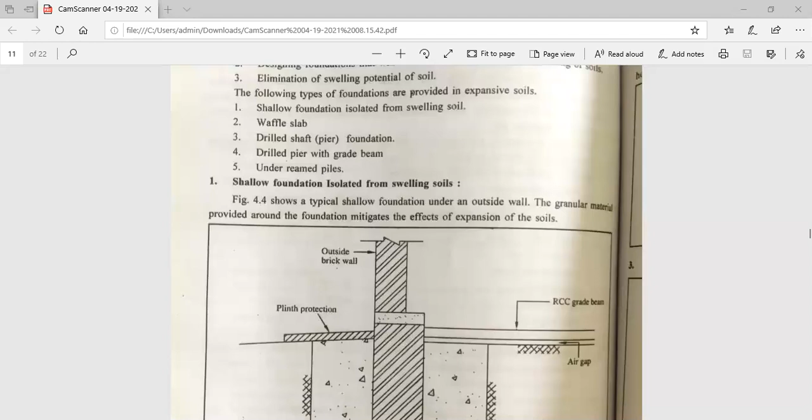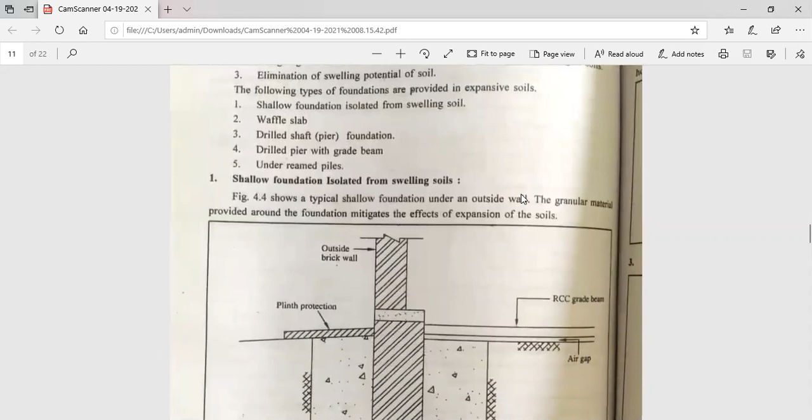Okay students, starting with the shallow foundation isolated from swelling soil.

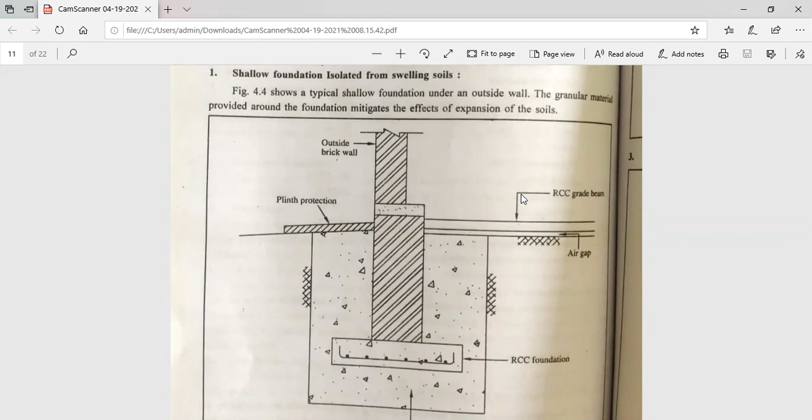This figure shows the typical shallow foundation under an outside wall. Granular material is provided around the foundation, which mitigates the effects of expansion of the soils. There is a plinth protection given, brick walls here, RCC foundation is given, granular fills are provided, and RCC grade beams are provided.

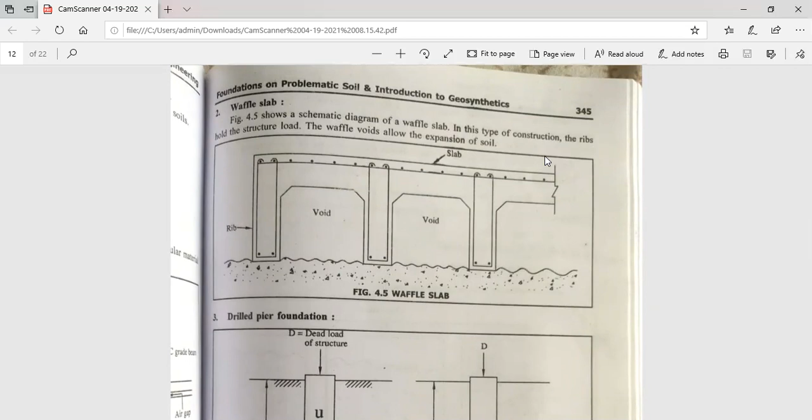Second is the Waffle slab. This figure shows a schematic diagram of a Waffle slab. In this type of construction, the ribs hold the structural load and the Waffle voids allow the expansion of the soils.

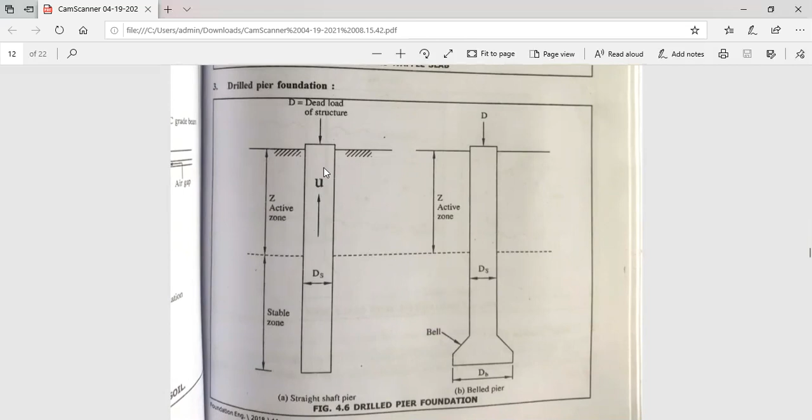Third one is a drill pier foundation. As you can see in this figure, this is our straight shaft pier, and second one is a belled pier. Z is described as the active zone, and below the active zone there is a stable zone. D is equal to dead load of the structure.

Drill piers are commonly used to resist the uplift forces caused by the swelling of soils. Drill piers made with an enlarged base are called belled piers, and when made without an enlarged base are called straight shaft piers. The bottom of the shaft should be below the active zone of expansive soil.

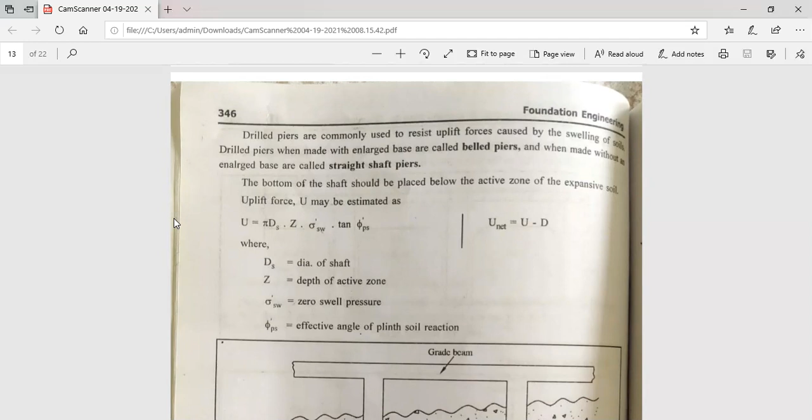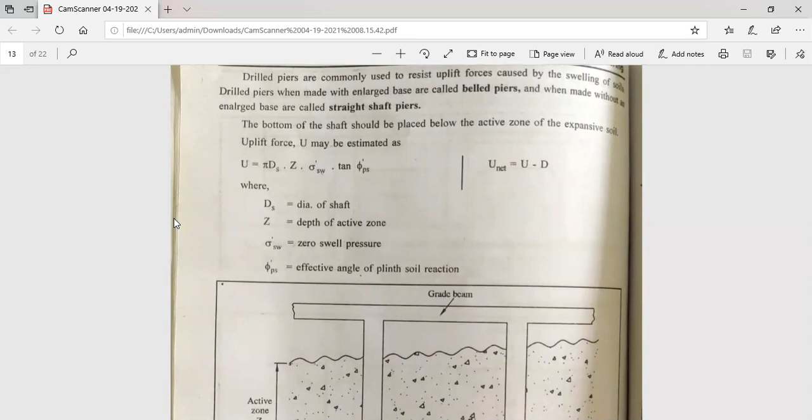Uplift force U may be estimated as U equals pi ds z sigma dash SW tan phi dash ps. Here ds is equal to diameter of shaft, z is equal to depth of active zone, sigma dash SW is equal to zero swell pressure, and phi dash ps is equal to effective angle of plinth soil reaction. This figure shows the drill pier with the grade beam.

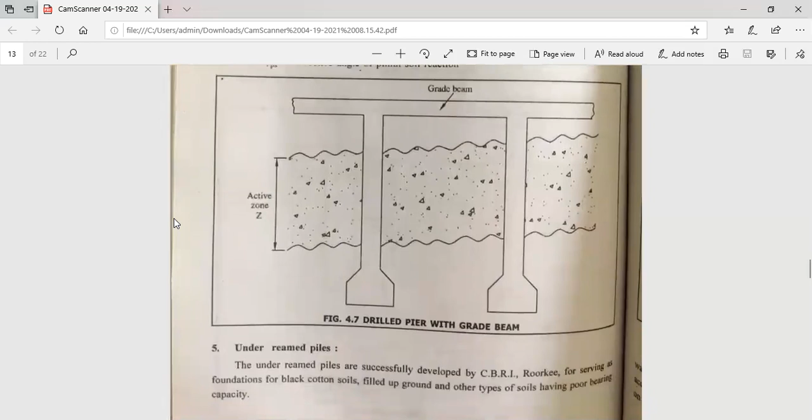Underreamed piles were successfully developed by CBRI Roorkee for serving as a foundation for black cotton soils, filled up grounds, and other types of soils having poor bearing capacity. The principle of this type of foundation is to anchor the structure at a depth where the ground movements due to seasonal moisture changes are negligible.

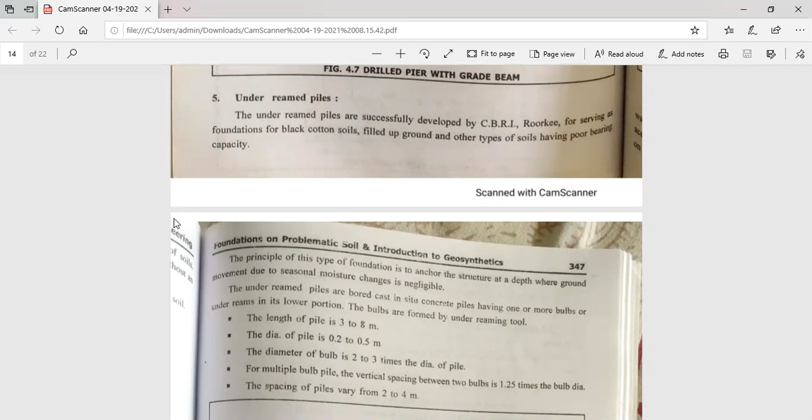Underreamed piles are bored cast-in-situ concrete piles having one or more bulbs or underreams in its lower portion. Bulbs are formed by an underreaming tool. Length of pile is 3 to 8 meters, the diameter of pile is 0.2 to 0.5 meter, and the diameter of bulb is 2 to 3 times the diameter of pile.

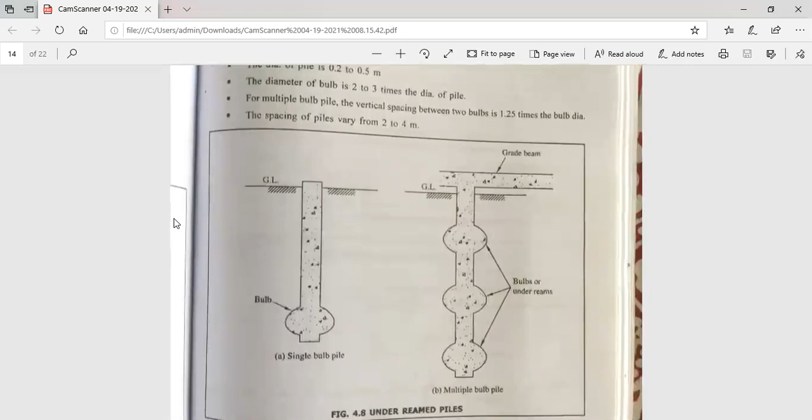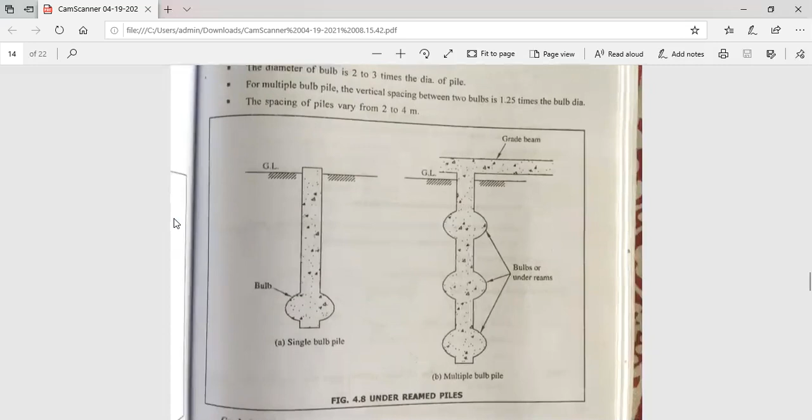For multiple bulb piles, the vertical spacing between two bulbs is 1.25 times the bulb diameter. The spacing of piles varies from 2 to 4 meters. There is a single bulb pile, and second one is a multiple bulb pile.

For grade beams, cast in situ as continuous monolithic beams on top of the piles, they support the wall of the building. On expansive soils, the beams are kept at least 8 centimeters clear of the ground to accommodate swelling of the soil. On non-expansive soils, the grade beams may rest on the ground.

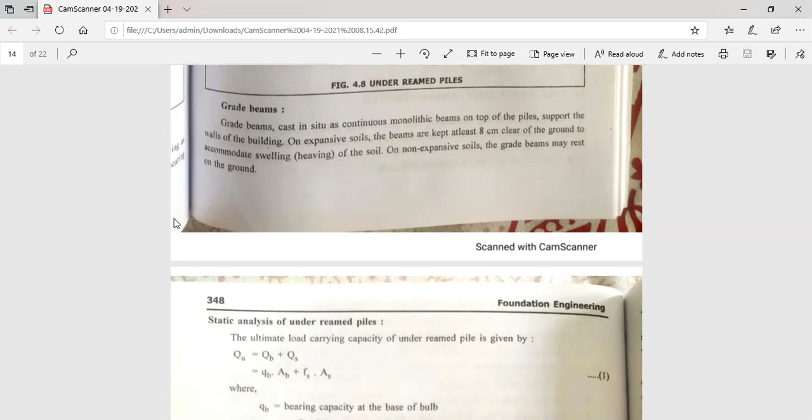Now, static analysis of underreamed piles. The ultimate load carrying capacity of underreamed piles is given by QU equals QB plus QS. Here QB equals small qB into AB, and QS equals FS AS.

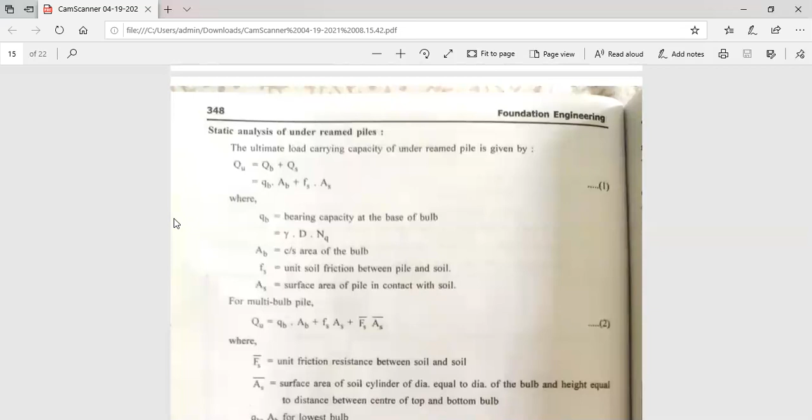Here small qB is equal to bearing capacity at the base of the bulb, and this equation is gamma D into Nq. AB is equal to cross-sectional area of bulb. FS is equal to unit soil friction between the pile and soil, and AS is equal to surface area of the pile in contact with soil.

For the multi-bulb pile, QU equals small qB into AB plus FS AS plus FS bar AS bar. Here FS bar is equal to unit friction resistance between soil and soil, AS bar is equal to surface area of soil cylinder of diameter equal to the diameter of bulb, and height equal to the distance between the center of top and bottom bulb. Here QB and AB are for the lowest bulb, and FS AS is for the pile above the top bulb.

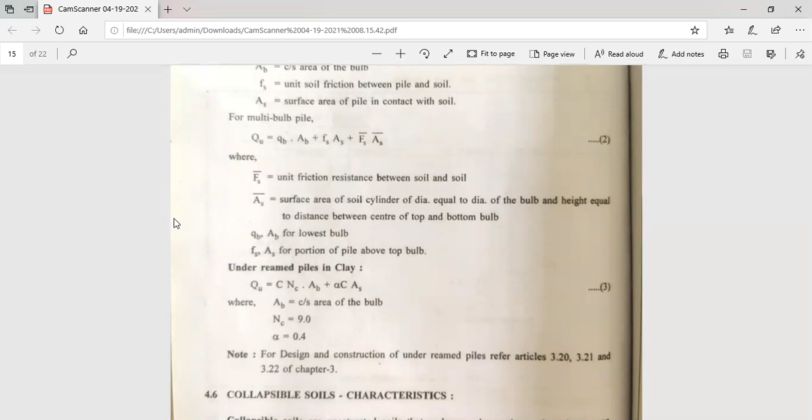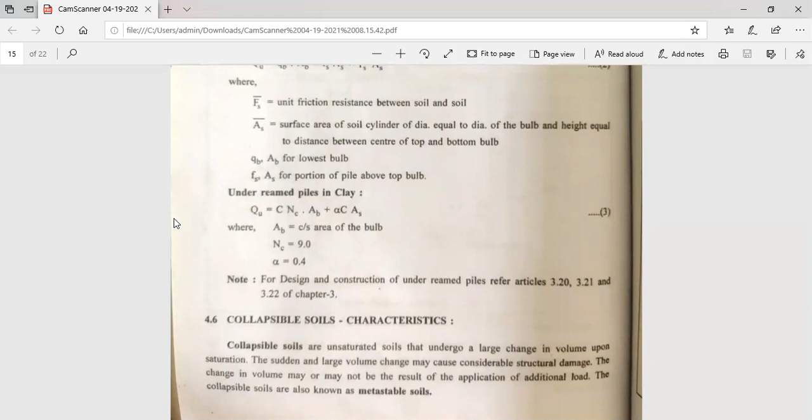So for underreamed piles in clay, the QU equation is equal to C NC AB plus alpha C AS. Here AB is equal to cross-sectional area of bulb, NC is equal to 9, and alpha is equal to 0.4.

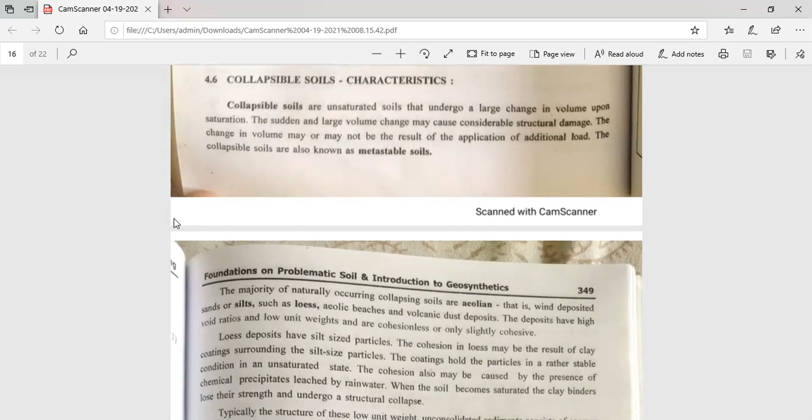For collapsible soil characteristics, collapsible soils are unsaturated soils that undergo a large change in volume upon saturation. This sudden and large volume change may cause considerable structural damage. The change in volume may or may not be a result of the application of additional load. So collapsible soils are known as metastable soils.

The majority of naturally occurring collapsible soils are aeolian, that is wind deposited sands or silts such as loess, aeolic beaches, and volcanic dust deposits. These deposits have a high void ratio and low unit weights, and are cohesionless or only slightly cohesive.

The loess deposits have silt-sized particles. The cohesion in loess may be the result of clay coating surrounding the silt-sized particles. The coating holds the particles in a rather stable condition in an unsaturated state. The cohesion also may be caused by the presence of chemical precipitates leached by rainwater.

When the soil becomes saturated, the clay binders lose their strength and undergo structural collapse. So the typical structure of these low unit weight, unconsolidated sediments consists of coarser particles bonded at their contact points by finer silts or clay fraction, or by the surface tension in the water at the air-water interface.

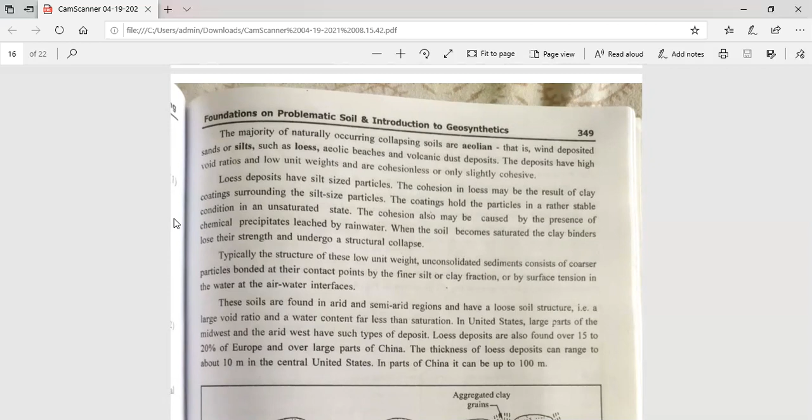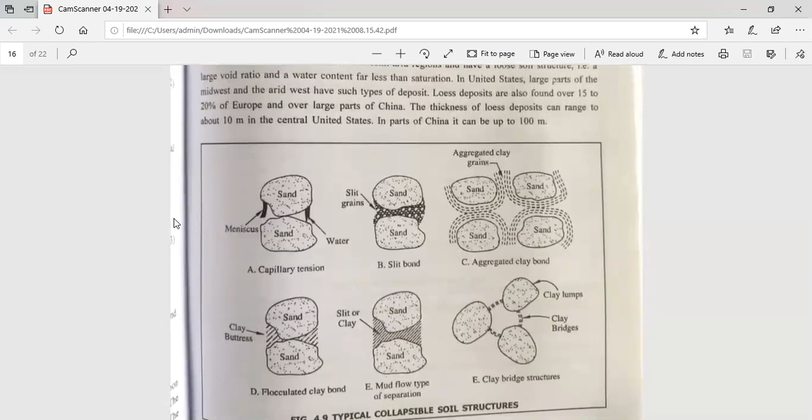These soils are found in arid and semi-arid regions and have a loose soil structure. The thickness of loess deposits can range about 10 meters in the central United States, and in parts of China it can be up to 100 meters.

The addition of water is widely used as an explanation for triggering soil collapse. Collapse can occur as the result of load application or wetting, or both. So collapse can occur either by increasing the stress above the soil strength or by lowering the soil strength below the stress. Whatever the physical basis of the bond strength, all collapsible soils are weakened by adding water.

Decreased strength is more immediate in cases where the grains are held together by capillary action, slower in the case of chemical cementing, and much slower in the case of clay buttresses. It may take long periods of time, even years, for total collapse to take place.

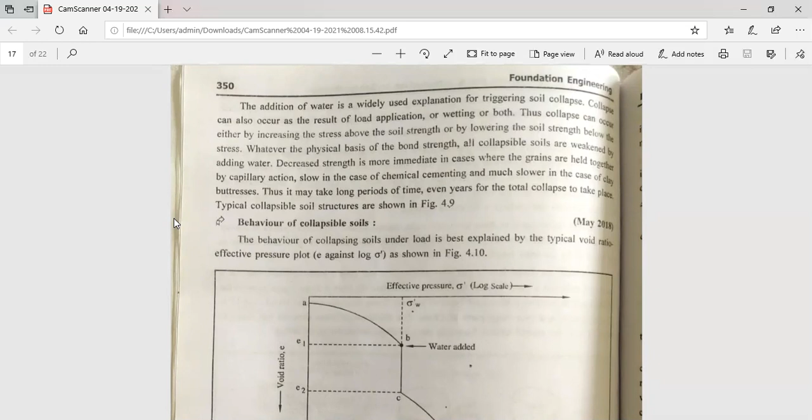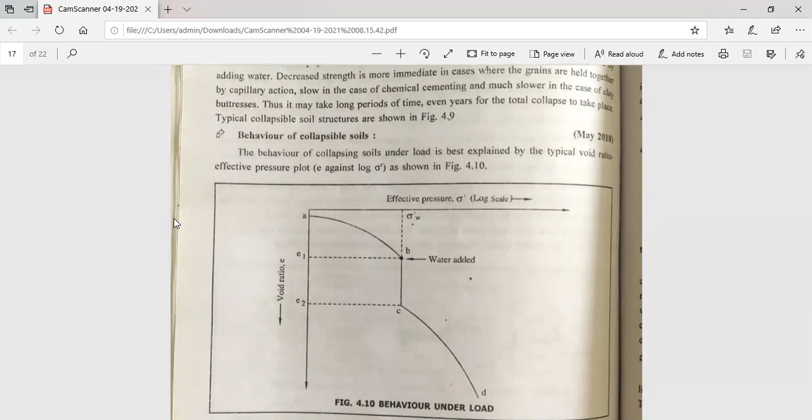The typical collapsible soil structure is as shown in the figure. The behavior of collapsible soils under load is best explained by a typical void ratio versus effective pressure plot, as shown in this figure.

At an effective pressure level of sigma dash W before saturation, the equilibrium void ratio is E1. However, if water is introduced to the specimen for saturation, the soil structure will collapse. After saturation, the equilibrium void ratio at the same effective pressure level, sigma dash W, is E2.

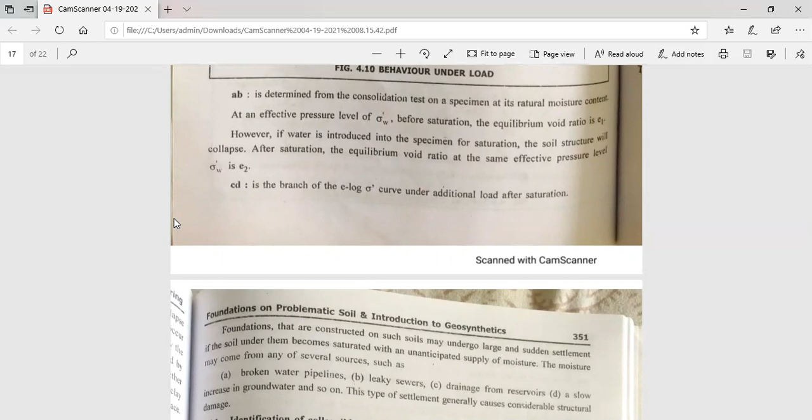Foundations constructed on such soils may undergo large and sudden settlement if the soil under them becomes saturated with an unanticipated supply of moisture. This moisture may come from several sources, such as broken water pipelines, leaky sewers, drainage from reservoirs, slow increase in groundwater, and so on. This type of settlement generally causes considerable structural damage.

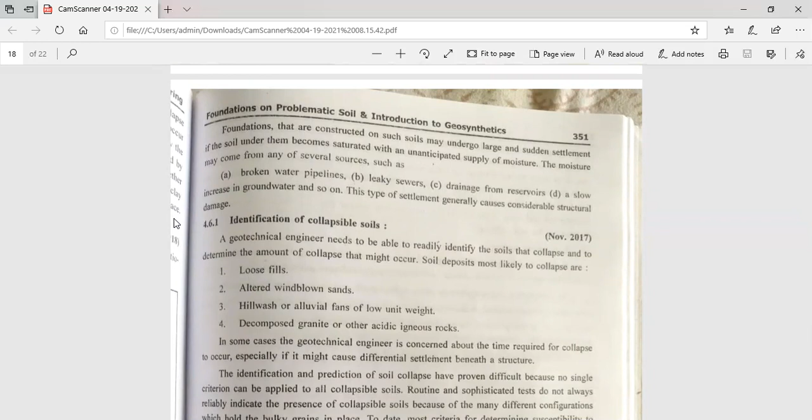For identification of collapsible soils, the geotechnical engineer needs to be able to readily identify the soils that collapse and to determine the amount of collapse that might occur.

The soil deposits most likely to collapse are loose fills, altered wind-blown sands, hillwash or alluvial fans of low unit weight decomposed granite or other acidic igneous rocks.

In some cases, the geotechnical engineer is concerned about the time required for collapse to occur, especially if it might cause differential settlement beneath the structure.

The identification and prediction of soil collapse have proven difficult because no single criterion can be applied to all collapsible soils. Routine and sophisticated tests do not always reliably indicate the presence of collapsible soils, because of the many different configurations which hold the bulky grains in place.

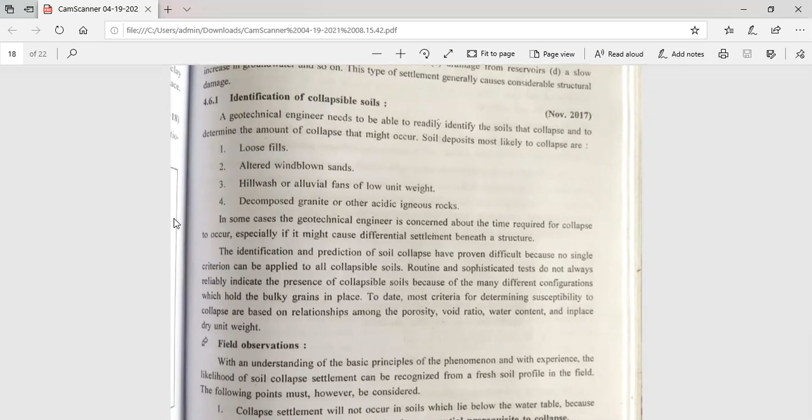To date, most criteria for determining the susceptibility to collapse are based on relations among the porosity, void ratio, water content, and in-place dry unit weight.

There are also field observations. With an understanding of the basic principles of the phenomenon and with experience, the likelihood of soil collapse settlement can be recognized from a fresh soil profile in the field, so that the following points must be considered.

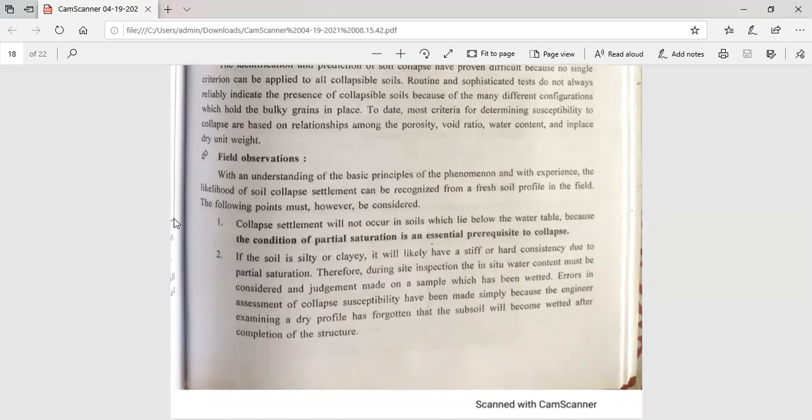Collapse settlement will not occur in soils which lie below the water table, because partial saturation is an essential prerequisite to collapse. Second, if the soil is silty or clayey, it will likely have a stiff or hard consistency due to partial saturation. Therefore, during site inspection, the in situ water content must be considered and judgment made on a sample which has been wetted. Errors in assessment of collapse susceptibility have been made simply because the engineer examined the dry profile and forgot that the subsoil will become wetted after completion of the structure.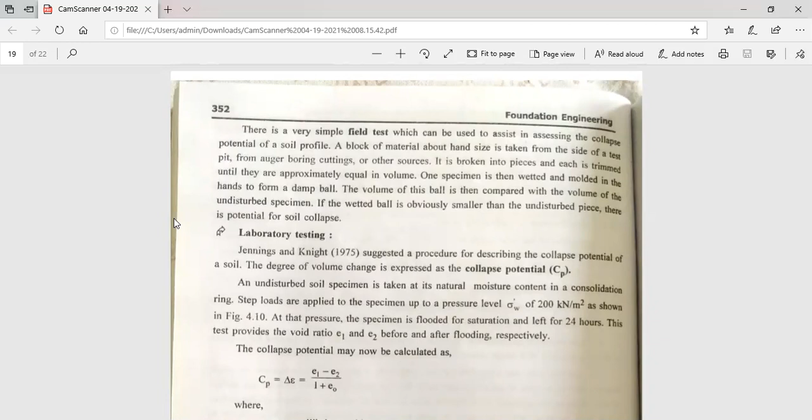There is a very simple field test which can be used to assist in assessing the collapsible potential of a soil profile. A block of material about hand size is taken from the side of the test pit, auger boring, cutting, or other sources. It is broken into pieces and each is trimmed until they are approximately equal in volume. One specimen is then wetted and molded in the hands to form a damp ball, and the volume of this ball is then compared to the volume of the undisturbed specimen. If the wetted ball is obviously smaller than the undisturbed piece, there is a potential for soil collapse.

There are some laboratory testing methods. Jennings and Knight in 1975 suggested a procedure for describing the collapse potential of a soil. The degree of volume change is expressed as collapse potential, known as CP. An undisturbed soil specimen is taken at its natural moisture content in a consolidation ring. Step loads are applied to the specimen up to a pressure level of sigma dash of 200 kN per meter square, as shown in the figure. At that pressure, the specimen is flooded for saturation and left for 24 hours. This test provides the void ratio E1 and E2, before and after the flooding.

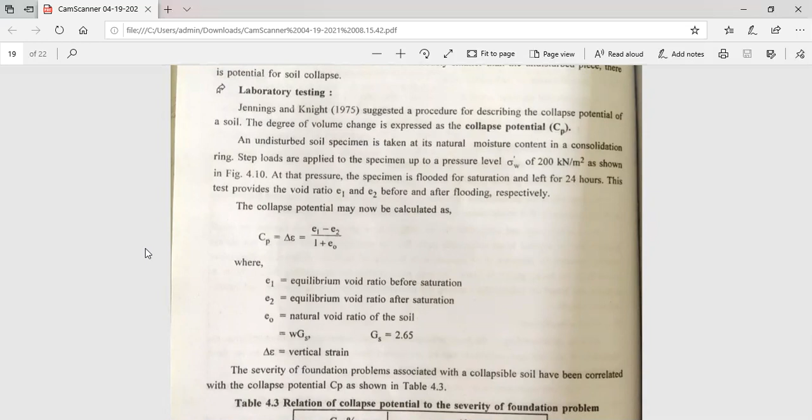The collapse potential may now be calculated as Cp equals delta E, which equals E1 minus E2, divided by 1 plus E0. Here E1 is the equilibrium void ratio before saturation, E2 is the equilibrium void ratio after saturation, and E0 is the natural void ratio of the soil, which equals W times GS, where GS equals 2.65, and delta E equals vertical strain.

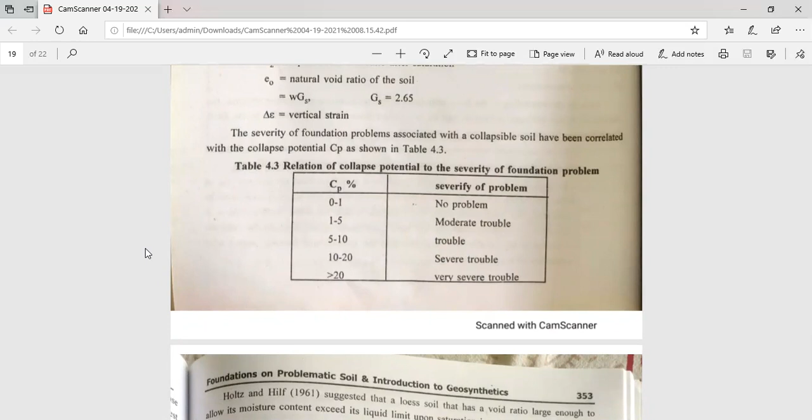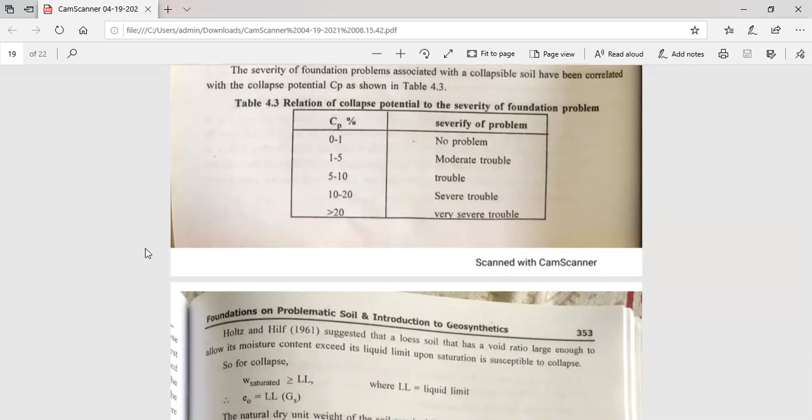The severity of the foundation problem associated with collapsible soil has been correlated with the collapse potential CP, as shown in the table. For CP percentage 0 to 1, it's no problem. For 1 to 5, it's moderate trouble. 5 to 10 is trouble. 10 to 20 is severe trouble. And for greater than 20, it's very severe trouble.

According to Holtz and Hilf, a loessial soil that has a void ratio large enough to allow its moisture content to exceed its liquid limit upon saturation is susceptible to collapse. So for collapse, W saturated is greater than or equal to LL, and E0 equals LL times GS. The natural dry density of the soil required for its collapse is gamma D equals GS times gamma W divided by 1 plus E0.

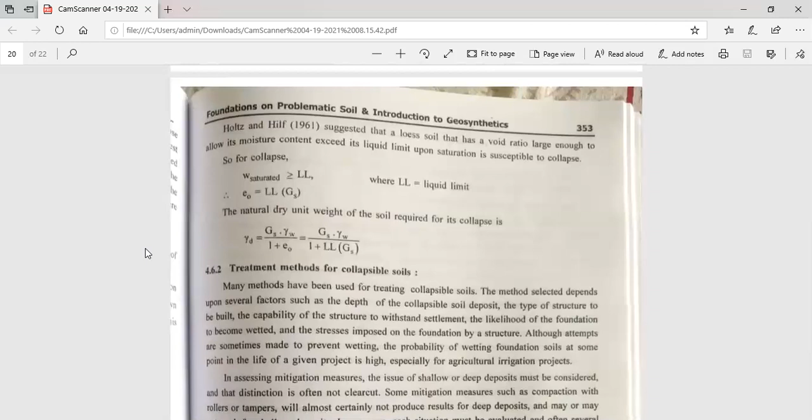Now, treatment methods for collapsible soils. Many methods have been used for treating collapsible soils. The method selected depends upon several factors, such as the depth of the collapsible soil deposit, the type of structures to be built, the capability of the structures to withstand settlement, the likelihood of the foundation becoming wetted, and the stresses imposed on the foundation by the structure.

Attempts are sometimes made to prevent wetting, since the probability of wetting foundation soils at some point in the life of a given project is high, especially for agricultural irrigation projects. In assessing mitigation measures, the issue of shallow or deep deposits must be considered, and that distinction is often not clear.

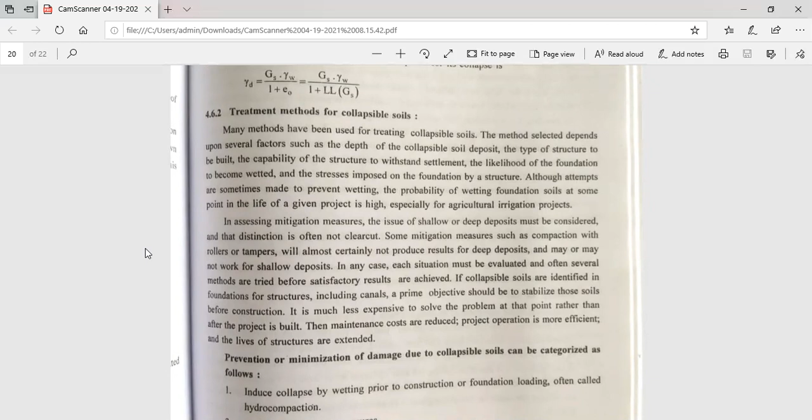Some mitigation measures, such as compaction with rollers or tampers, will most certainly not produce results for deep deposits and may or may not work for shallow deposits. In any case, each situation must be evaluated, and often several methods are tried before satisfactory results are achieved. If collapsible soils are identified in foundations for structures, including canals, a prime objective should be to stabilize those soils before construction. It is much less expensive to solve the problem at that point rather than after the project is built, so maintenance costs are reduced, the project's operation is more efficient, and the lives of structures are extended.

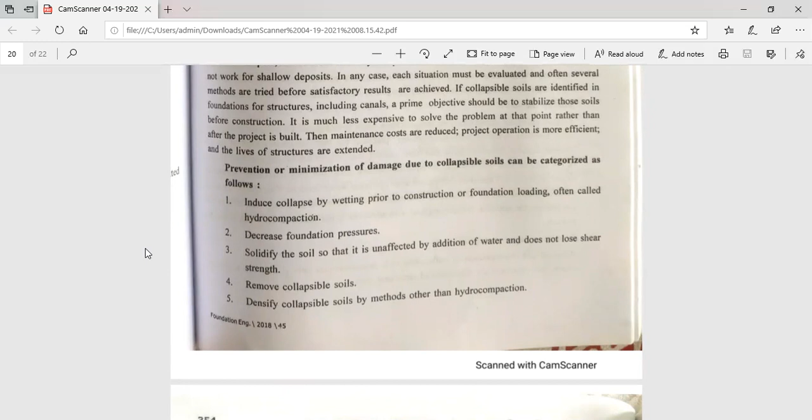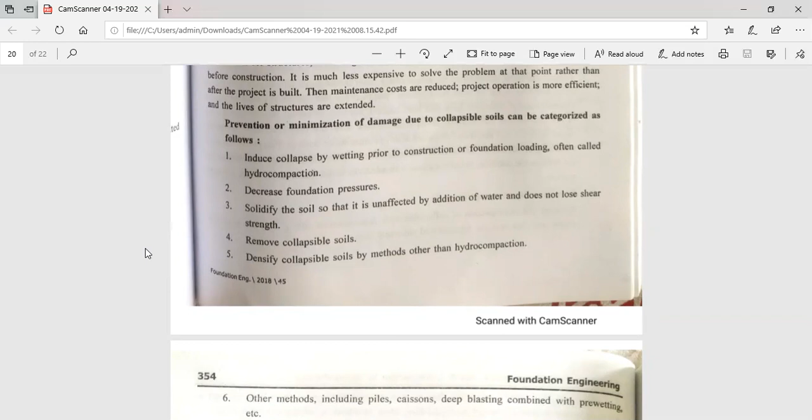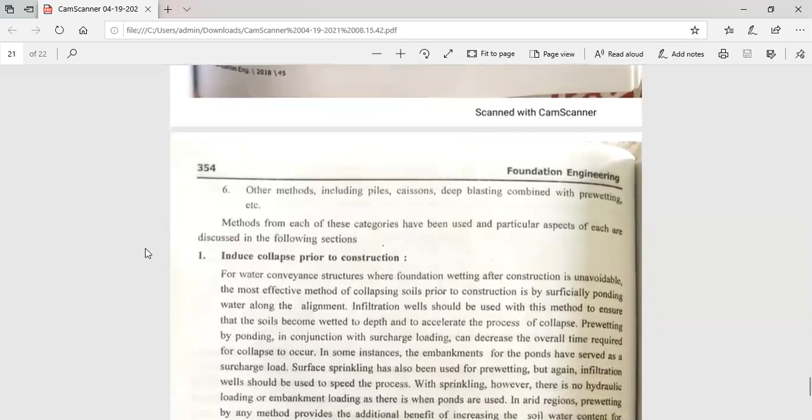Prevention or minimization of damage due to collapsible soils can be categorized as follows: induce collapse by wetting prior to construction or foundation loading, often called hydrocompaction; decrease foundation pressure; solidify the soil so that it is unaffected by addition of water and does not lose its shear strength; remove collapsible soil; densify collapsible soil by methods other than hydrocompaction; and other methods including pile foundations, deep blasting combined with pre-wetting, etc.

Some methods from each of these categories have been used, and particular aspects of each are discussed in the following.

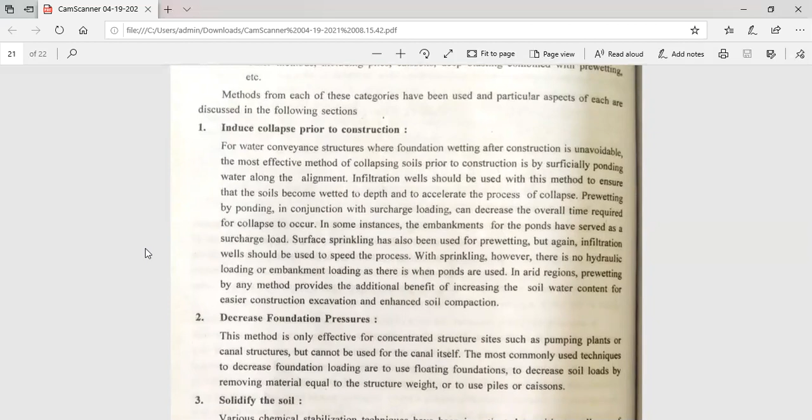First is induced collapse prior to construction. For water conveyance structures where foundation wetting after construction is unavoidable, the most effective method of collapsing soil prior to construction is by surficially ponding water along the alignment. Infiltration wells should be used with this method to ensure the soil becomes wetted to depth and to accelerate the process of collapse.

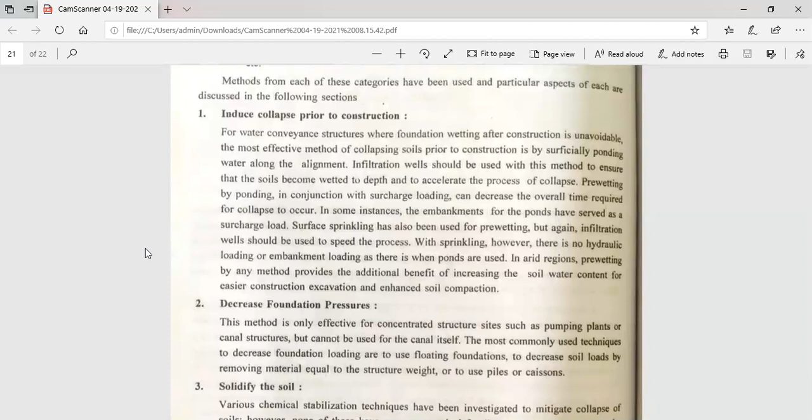Pre-wetting by ponding in conjunction with surcharge loading can decrease the overall time required for collapse to occur, and in some instances the embankment for the ponds has served as a surcharge load. Surface sprinkling has also been used for pre-wetting, with infiltration wells used to speed the process. However, with sprinkling there is no hydraulic or embankment loading as there is when ponds are used. In arid regions, pre-wetting by any method provides the additional benefit of increasing soil water content for easier construction excavation.

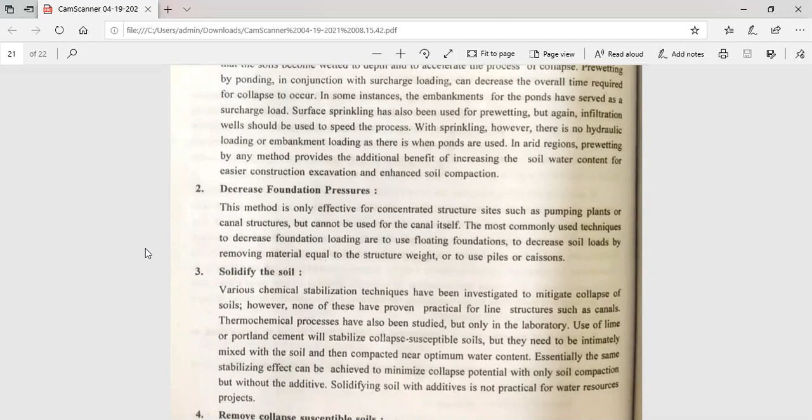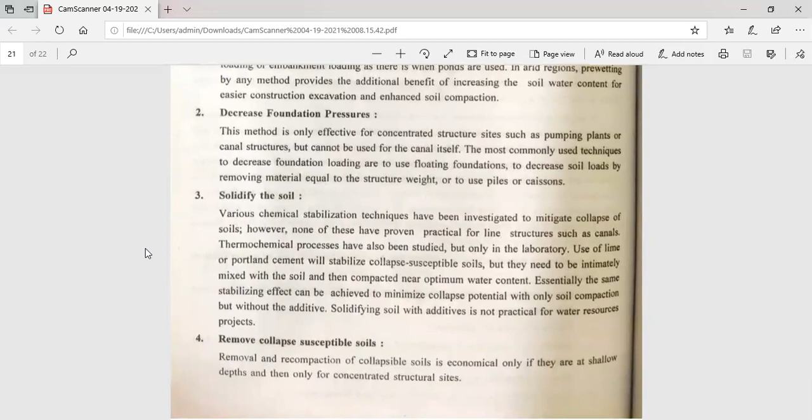Decreasing foundation pressure: this method is only effective for concentrated structure sites such as pumping plants or canal structures, but cannot be used for the canal itself. The most commonly used techniques to decrease foundation loading are to use floating foundations, to decrease soil loads by removing material equal to the structural weight, or to use piles or caissons.

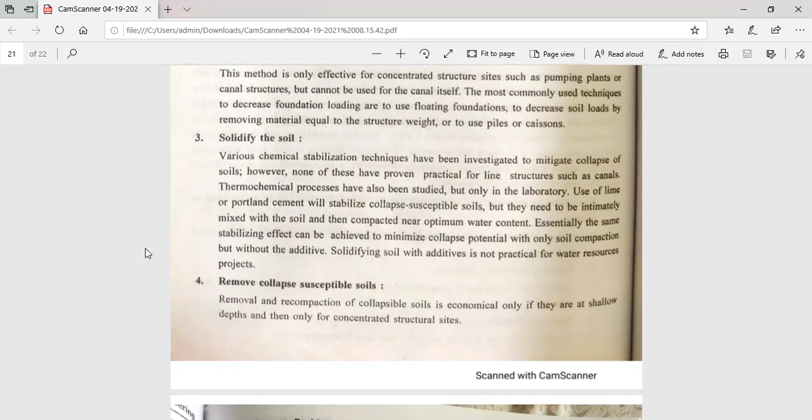Solidify the soil: various chemical stabilization techniques have been investigated to mitigate soil collapse, but none have proven practical for linear structures such as canals. Thermochemical processes have been studied, but only in the laboratory. Use of lime will stabilize collapse-susceptible soils, but it needs to be intimately mixed with the soil and then compacted near optimum water content. Essentially the same stabilizing effect can be achieved to minimize collapse potential with soil compaction alone, without any additive. Solidifying soil with additives is not practical for water resources projects.

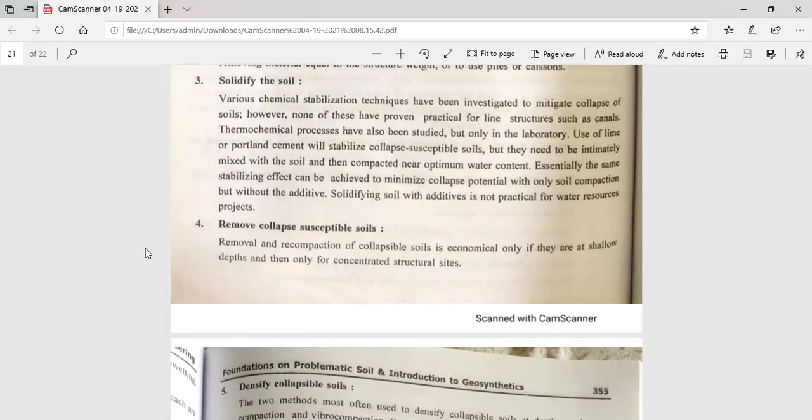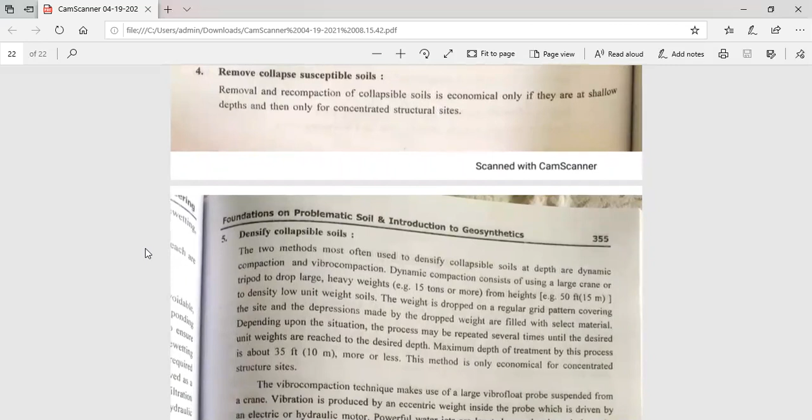Removing collapsible susceptible soil is economical only if it is at shallow depth, and then only for concentrated structural sites.

Densify collapsible soil: the two methods most often used to densify collapsible soils at depth are dynamic compaction and vibrocompaction. Dynamic compaction consists of using a large crane or tripod to drop a heavy weight from height to densify low unit weight soil. The weight is dropped on a regular grid pattern covering the site, and the depressions made by the drop weight are filled with select material. Depending on the situation, the process may be repeated several times until the desired unit weight is reached to a desired depth. The maximum depth of treatment by this process is about 35 feet, more or less. This method is only economical for concentrated structural sites.

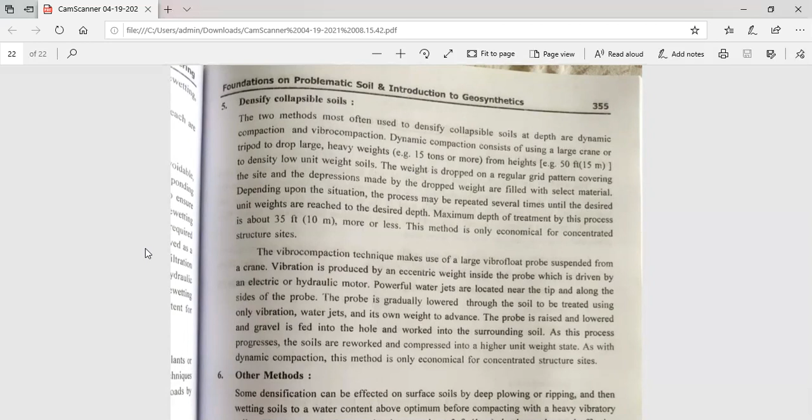Next is the vibrocompaction technique, using a large vibro float probe suspended from a crane. The vibration is produced by an eccentric weight inside the probe, driven by an electric or hydraulic motor. Powerful water jets are located near the tip and along the sides of the probe. The probe is gradually lowered through the soil to be treated using vibration, water jets, and its own weight to advance. The probe is then raised and lowered, and gravel is fed into the hole and worked into the surrounding soil. As this process progresses, the soil is reworked and compressed into a higher unit weight state.

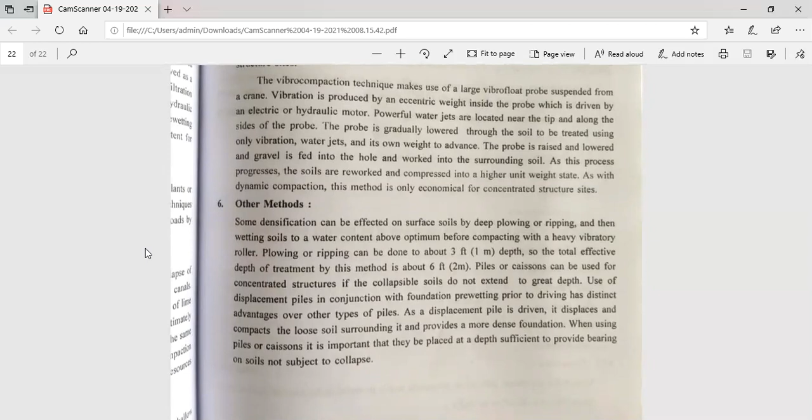As with dynamic compaction, this method is only economical for concentrated structural sites.